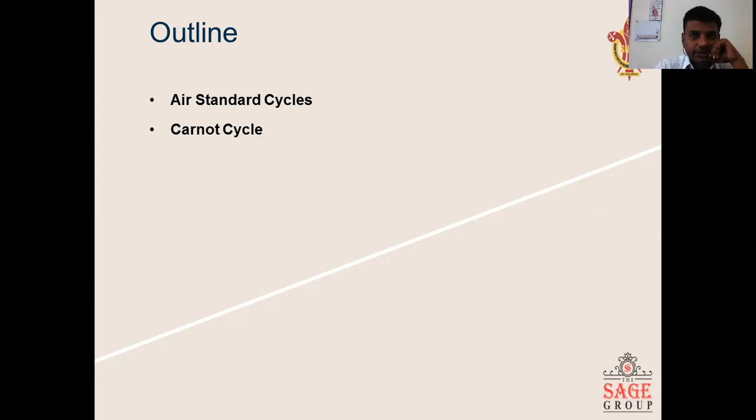So in today's class, we will study about air standard cycle. What are the various assumptions that have been taken while studying air standard cycle? Then we will study one of the most important air standard cycles, that is Carnot cycle. Okay. So let's first start with air standard cycle.

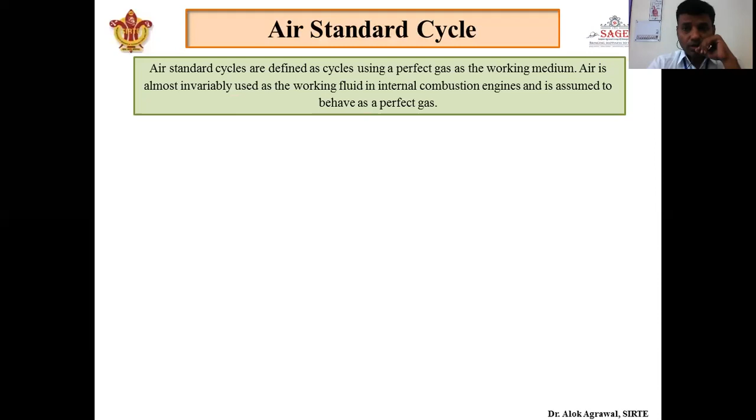So what is called air standard cycle? Air standard cycle is defined as a cycle which uses a perfect gas as a working medium. Okay. So agar hum perfect gas ko our working medium consider kar rahe hain, then we call it as an air standard cycle. Air is almost invariably used as working fluid in internal combustion engines, because for burning of fuel oxygen is required, and oxygen is present in the air. So we consider that air is a perfect gas, and when we consider air as our working medium, we call it an air standard cycle.

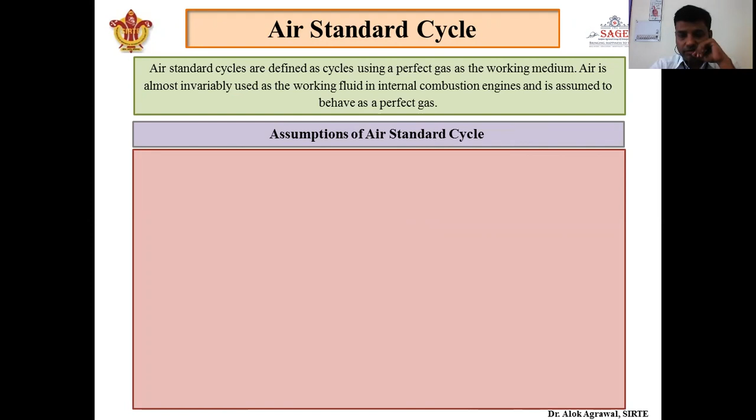Next, apart from that, there are various assumptions that have been taken in air standard cycle. So I am telling about the various assumptions taken. The first is, as we have already studied, that the working medium is assumed to be a perfect gas, and we consider air as our perfect gas, and any perfect gas follows the rule PV = MRT. Okay. So this is the first assumption, that the gas has to be a perfect gas and follows the relation PV = MRT.

Next, there is no change of mass of working fluid throughout the process. Means whatever amount of mass is coming inside the system, it will remain constant, and there is no loss of mass due to leakage or anything else. That is assumed, but actually it is not there.

Again, all the processes that constitute a cycle are reversible. Means every process that is occurring in that cycle, we assume to be reversible. None of them can be irreversible. This is an assumption, as we already studied in our thermodynamics, that no cycle is reversible. All cycles are irreversible. All processes are irreversible. Okay. So here we consider that all the processes are reversible.

Next assumption is that the working medium has constant specific heat, but in actual, it is not true. Specific heat of gas always increases with temperature. So when fuel burns, temperature increases, and so does the specific heat. But ideally, we have to take the assumption here that there is a constant specific heat of working medium.

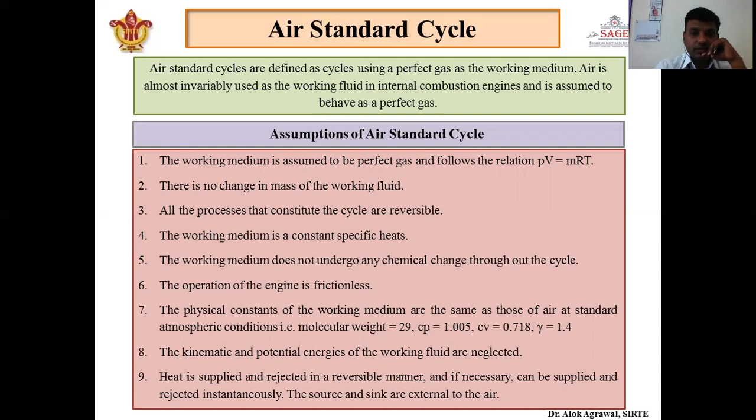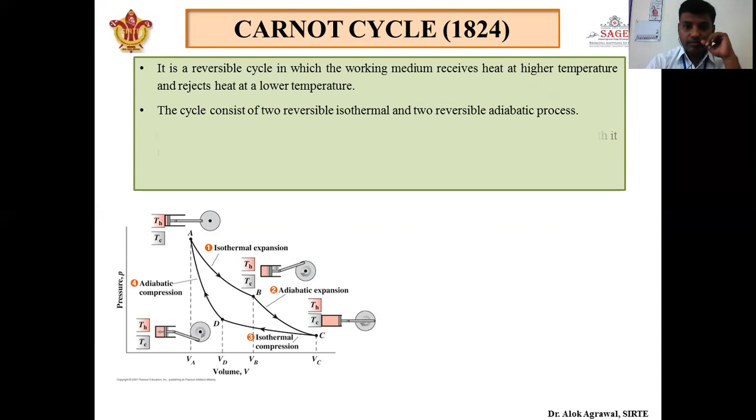Carnot cycle actually is represented as a standard of perfection. It means it is assumed that whatever efficiency we are getting is maximum between the two temperature limits when it works according to the Carnot cycle.

First there will be an isothermal expansion from A to B, then adiabatic expansion, then isothermal compression, then adiabatic compression. So if a heat engine works on this four-process Carnot cycle where the source temperature and sink temperature are fixed, then we assume that it will give maximum efficiency and we can say that it is a perfect cycle, and any other cycle is compared with this cycle to get how near the actual cycle is to the Carnot cycle.

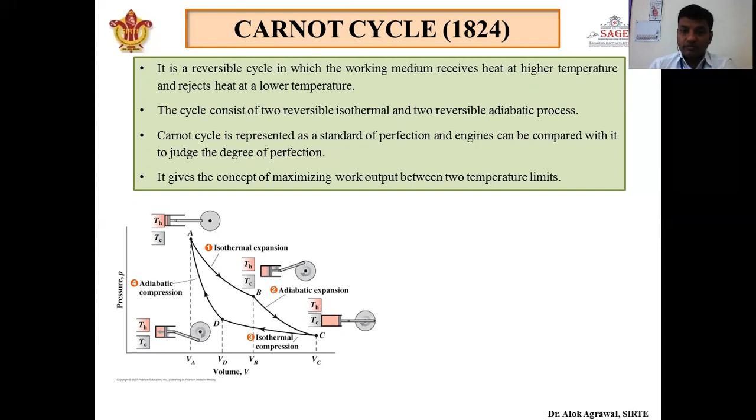Again, it gives the concept of maximizing work output between two temperature limits, as I have already told you. So this is an animated video about the process. Here isothermal expansion is occurring. Here adiabatic expansion, then isothermal compression, then there will be adiabatic compression. So it consists of source and sink. Source is at higher temperature, sink is at lower temperature. Heat is added through the source, heat is rejected in the sink.

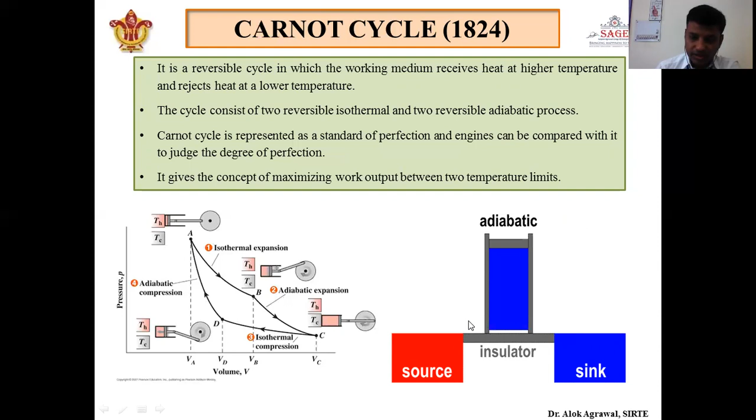Here isothermal expansion, adiabatic expansion, isothermal compression, C to D, and finally adiabatic compression. So here it has been seen that in the first process, isothermal expansion, heat is transferring. In the second process, adiabatic, there is no heat transfer, this is an insulator. Then again heat transfer occurs in isothermal compression, and again it is adiabatic compression where no heat is transferred. So this consists of four processes where the piston moves, expands, and then compresses. Here again isothermal expansion, adiabatic expansion, then isothermal compression, then adiabatic compression. In this the cycle repeats itself.

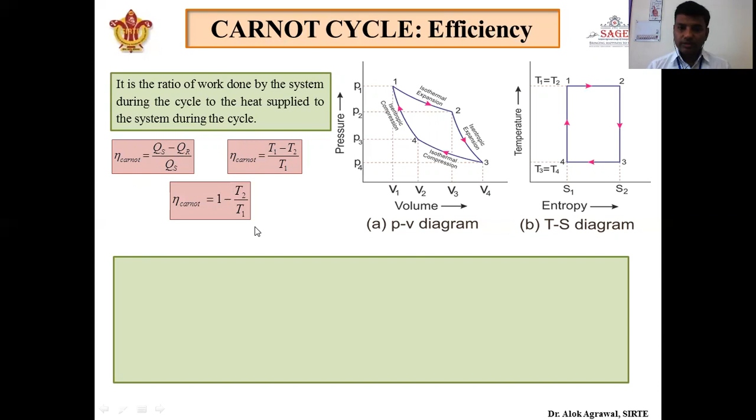So the efficiency of the Carnot cycle is heat supplied minus heat rejected upon heat supplied. So this will be the work output and this is the heat supplied. In terms of temperature, efficiency of Carnot cycle will be T1 minus T2 upon T1: source temperature minus sink temperature upon source temperature. Again, it can be written as 1 minus T2 by T1. So this is the efficiency of Carnot cycle. Remember T1 is the temperature of the source and T2 is the temperature of the sink.

We have just discussed that any engine works between two temperature limits. High temperature is called source, low temperature is called sink. So T1 is source temperature, T2 is sink temperature. So how does the efficiency depend upon these two temperatures? The sink temperature is generally atmospheric temperature, because whatever heat is developed inside the engine is rejected to the atmosphere. Hence it is fixed, so we cannot change the value of T2 in this equation.

So to increase the efficiency, what do we have to do? We have to increase the temperature of the source. As T1 increases, this whole term reduces because it is in the denominator, and as this term reduces, the overall term increases and the Carnot efficiency increases. So to increase the efficiency of the Carnot cycle, source temperature should be increased. And between two fixed temperatures T1 and T2, Carnot cycle will give maximum efficiency compared to any other air standard cycle.

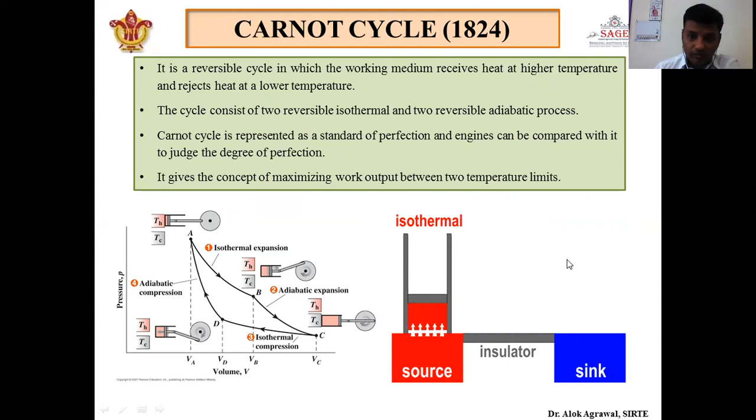And net work output of Carnot cycle is low because there are alternately isothermal and isentropic processes. Again, this is not practically possible, because as we have seen in this diagram, the wall should continuously be made isothermal and adiabatic after each process. From A to B it has to be isothermal, then B to C adiabatic, then again isothermal, then again adiabatic. So it is very difficult to change the wall of the piston cylinder arrangement. Carnot cycle is practically not possible. So this is all about Carnot cycle.